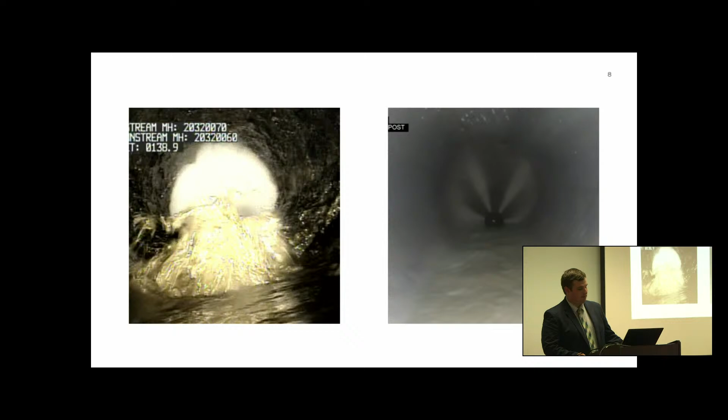These are some photos of that cured in place piping I was talking about. On the left, that's what a pipe in Sea Palms West looks like prior to rehab. That water you see boiling up is actually groundwater that's coming in the bottom of that pipe. And that pipe is so deep that the water table never gets below that point, even when it's been very dry conditions.

So that amount of water was coming in there at a minimum at all times, because that pre-inspection photo was taken in one of the driest parts we've had in the last year. So that's about the low amount of water that would be coming into that line. So that's taking up capacity in the system for something that's not beneficial for us.

So on the right, that's what the inside of that pipe looks like today. So you see that white liner, that is a new pipe that has been created inside the old pipe. That's actually at the exact same location in the pipe. From one end to the other we measure, and we know where we're at. So no more water getting in there. The water you see in there was actually the water from the jetter going through the line cleaning the pipe. So there's no more groundwater getting into that pipe, and we have a brand new pipe inside the old pipe.

It doesn't rely on the old pipe, what we call a host pipe, for anything other than giving it shape. It doesn't rely on it for any of its structural integrity. It just makes sure that it stays circular, because what we do is essentially inflate a bag inside there and create the pipe, because it makes a fiberglass pipe inside there.

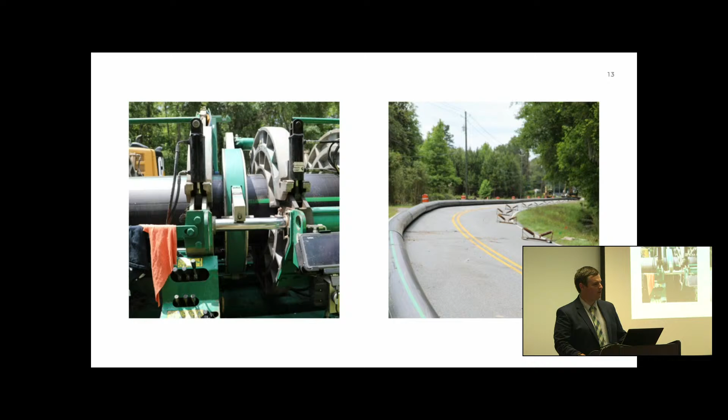Well, you can't install that much pipe in Canal Road or on the edge of Canal Road and have it stretched out that far and actually have cars being able to pass through. So that pipe is installed now and tested. We're finishing up, hopefully in the next couple of weeks, doing the final installs on Ogden down by the canal, and then we'll tie everything together, and theoretically by the end of June, all the flow will be going through the new pipe.

We talked about meter replacements. We're changing out every water meter in the system, and we're getting some benefits there. Not only do we get more accurate readings, some of our registers, the heads on top of the meters, were not functioning. You're not getting overbilled. You weren't getting billed. You're getting a zero read even though you're using water every month. So we're getting those replaced.

But these new ones are called AMI meters, and what that means is we can read meters from our office. Instead of having to send a truck out to go to your house and drive by to read the meters, we can read the meters from our office. Also, we get data logging capabilities with these where we can tell you your usage by the hour. So if you ever have a high bill and you want to know why, we can pull up your usage for the hour, for the month, and we can tell you when you're using water.

Now that'll tell you 2 or 3 things. One, you may find out that you're just using more water than you realize because all your water usage is between 7 in the morning and 10 at night when you're at home. Or you may find that your irrigation system is popping on at 1 in the morning while you're asleep and you didn't realize it was running every morning at 1 o'clock. But we can also find out if you have a leak that's causing that to occur.

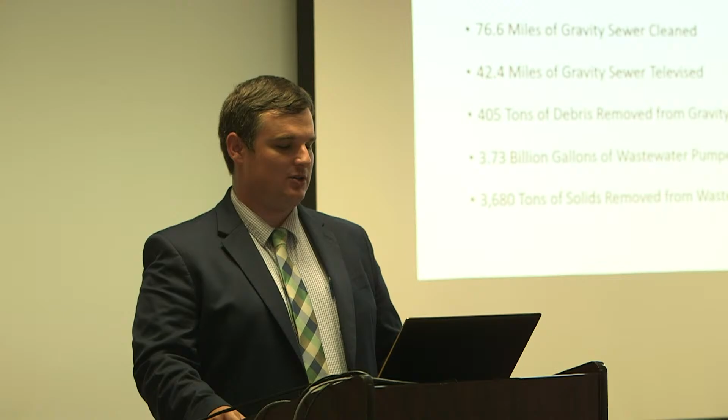So, in the big picture, we talk about things on a day-to-day basis, but for the last 12 months, we have cleaned, and cleaned means jetted. You'll see some of our jet trucks driving around town. We've cleaned 76.6 miles of gravity sewer. Now, 76.6 miles is a lot of pipe. We talk about it in terms of linear feet, but if I tell you we cleaned over 300,000 linear feet of pipe, that's not really a reference anyone can understand.

So we cleaned 76.6 miles of gravity sewer, and just as a reference point, that is roughly the length of Hadrian's Wall in the United Kingdom, the very old wall that was built to keep the Romans and the early Englanders away from each other. That's also further than it is from Brunswick to Savannah, according to Google Maps. So we went past Savannah in miles of pipe cleaned.

We televise. We inspect from the inside. We put a camera in the line and inspect from the inside 42.4 miles of gravity pipe last year. And that ratio makes sense for televising versus cleaning because you clean twice as frequently as you televise. So about half is about where we'd expect that to be. So 42.4 miles is roughly 80% of the length of the Panama Canal. And that's pipes that we inspect so we know what condition they're in.

While we were cleaning those sewer lines, we pulled out 405 tons of debris. And that debris is small particles that fall out. They don't stay suspended in the flow. The velocities slow down a little bit at times and those will settle out. So 405 tons of debris that never actually made it to our wastewater plants.

Well, 405 tons of debris is the weight of 60 adult elephants. I'm an Alabama fan, so I like elephants, so 60 adult elephants got pulled out of the gravity sewers around here in the past 12 months.

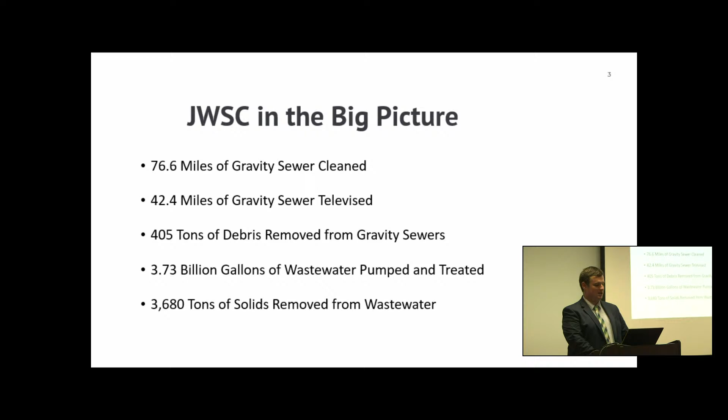So, moving on to 3.04 billion gallons of water treated and pumped in the past year. Now, if you're paying attention, that 3.04 billion gallons is less than 3.73 billion gallons of sewer treated. So why do we have more sewer than water? Well, there's 2 reasons. One, on the mainland, we have large industrial customers that have their own drinking water wells and potable use wells, and they send us their sewer, and we don't sell them water.

We also have what's called inflow and infiltration, or I&I, that gets in our system. That's rainwater and groundwater that finds its way into the sewer system that ends up passing through the plant, so you're always going to have more sewer than water.

3.04 billion gallons of water is enough to fill up Spaceship Earth at Epcot Center at Disney World 200 times. So if you've seen the big circular structure at Disney World, that's 200 of those in the amount of water that we produced in the last year.

There were 717 new service locations, and a service location that was created could be a new single-family residence that was created, or a new apartment complex that was coming online. So that's the number of parcels that has new services at this point. Of those 717, 596 of them actually have meters installed. So that means there's about 120 of those that they've created the parcel, but they haven't actually installed a new meter yet.

In the past 12 months, we've expended $24.2 million in capital projects. Those are projects that we are doing to reinvest in our system. We use a philosophy called asset management so that we know where the worst of the worst in our system is, so we can spend the money where it needs to be spent to replace the assets that need to be replaced.

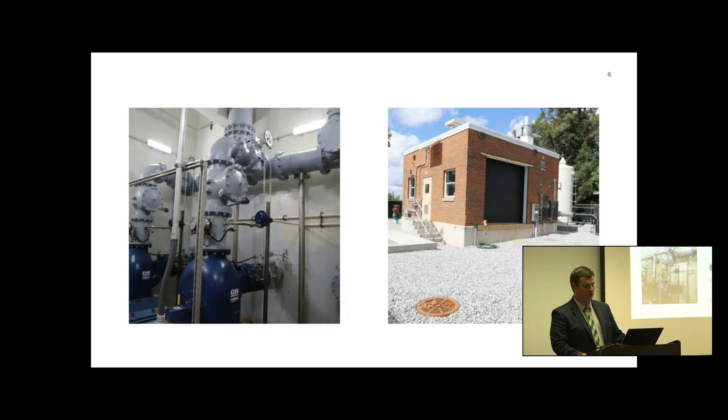On the left, you see a concrete structure, and that is actually the top of the new wet well. That system was bottlenecking in there because it didn't have enough fall in the gravity system, so we put a deeper wet well in so that the gravity system functioned better, and that station is operating very effectively since its completion. Here's some photos of our SCADA system.

On the left, that's just a screenshot of one of the pages we have where we get data. All of those numbers are individual pumping stations throughout the county. It starts with a 4, so that means it's on the mainland. All of those stations... see what's going on. If it turns white, that means the station is pumping. If it's black, it's not pumping.

And the reason we do that is it's called high performance graphics. We want to immediately be able to know what's going on. We don't want to have to interpret what the different colors are. If it's black, it's not pumping. If it's white, it is pumping. So we know which stations are pumping, which pumps at the individual stations are pumping. We also get a lot of trending data here, so we know when a station's maybe not pumping as efficiently as it had been, so we need to go check those pumps to make sure nothing's wrong.

And on the right, that's what the inside of the SCADA panels that we installed look like. We installed 138 of these panels, and every one of these stations has a panel that looks like this. A lot of contactors and relays in there that give us information about what's going on. It also can call us for alarms if there's a problem, but also we can remotely connect into these stations and see what's going on so that we don't have to worry about going out for a call that could wait till the morning, so our guys can actually get some sleep at night.

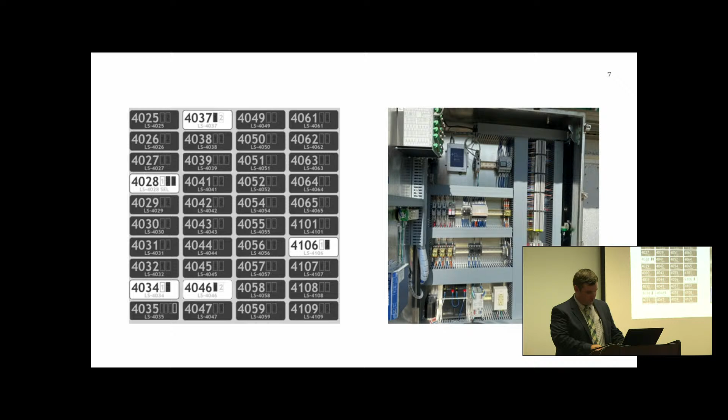Excuse me. All right, here's some of the pictures before and after on the cured in place piping. This occurred in the Sea Palms West neighborhood. On the left, that's a before picture. You see a lot of water bubbling up there at the bottom. That's actually groundwater that's coming in through the bottom of that pipe. That pipe is 17, 18 feet deep, and so there's constantly that much water boiling up in that pipe before we did this project. You can imagine that much water getting in the pipe, and this is just one segment.

We did over 20 in this neighborhood. They weren't all in this condition, but they all had water coming into them. That's taking up capacity in the system for reasons that we don't need it to take up. So on the right, we put a new pipe inside the old pipe without having to dig up the street. So essentially, we take a sock and put it in there. It's not actually like a sock, but we call it a sock.

And it's got resins in there, and we inflate it with water, take boiling water and push it out, and it creates a new pipe inside the old pipe. And so it uses the old pipe, the host pipe, simply to give us its shape, but it's not required to give it its structure.

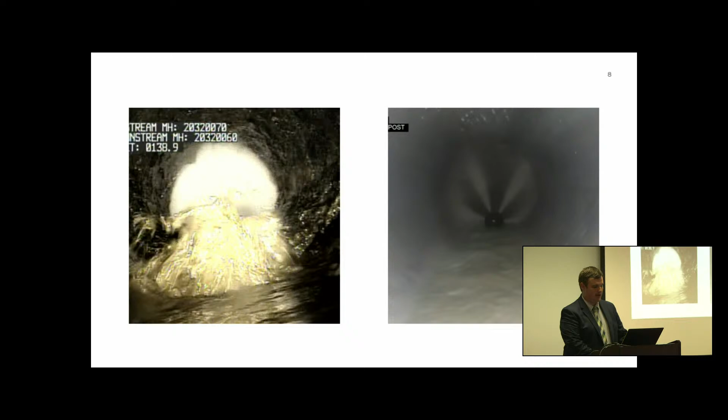The pipe is entirely structural, and we have a brand new pipe on the inside of it. So right there, you see some water in the pipe. That's just the residual water from the jet truck actually dragging the jet head through there to clean the pipe out. So that amount of groundwater is no longer entering the system.

Here's some photos from Magnolia Park. On the left, those are the water lines going in. If you see pipe on the side of the road, blue pipe is for water, green pipe is for sewer. If you see black plastic pipe, it will either have a green or blue stripe on it. So the blue pipe going in there is new water lines installed in the Magnolia Park neighborhood. That project's been completed. The city's still finishing their stormwater and paving portions of that.

And on the right, those are the engineered drawings that the contractor keeps with him in his truck. And what you see there, you see some things highlighted, you see some red marks on there. That's the contractor taking notes for what he's got completed and where he's had to change things from the original drawings that were given to him.

As we know, things are done underground. We don't always know where everything exactly is. So we get there and figure out this has got to shift a few feet one way or the other. These red line drawings let us know where that has occurred, so we can put that in our system so that in the future we know where those pipes are instead of having to figure it out when we start digging.

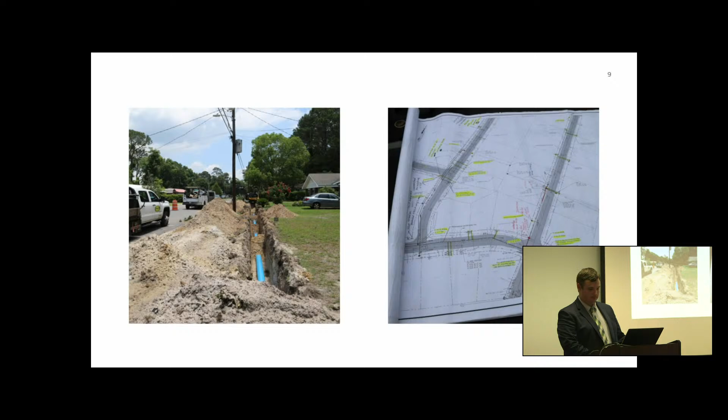Ongoing projects, we've got two large projects that are very near completion, at Academy Creek, the wastewater treatment plant on the mainland. The SPLOST North Mainland project is wrapping up very soon. And that's to reroute flow from Harry Driggers down to the canal. Meter replacement project is ongoing, and we recently kicked off a project in the Arco area to extend water and sewer to that historic neighborhood.

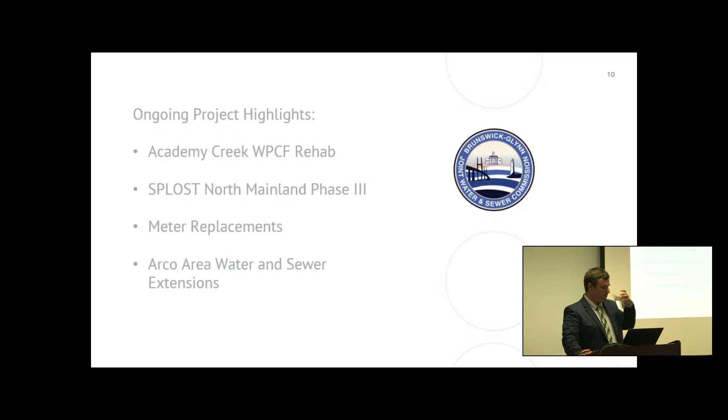So, if you were at this presentation last year, you saw some photos of a bunch of rebar that had been tied together and forms being built for concrete. Well, that's what that structure looks like today. That is new tertiary filtration equipment that helps remove additional solids from the wastewater. And on the right, that's what the inside of those basins look like. The water comes in the back of the structure there, and then flows through.

And the water will actually flow through these cylindrical tubes that have cloth media on them, and the cloth media prevents solids from going through. The best way I can explain it is it's kind of like putting shag carpet from the 70s on a cylinder and letting the solids stick to the shag carpet, kind of like a coffee filter. So that water goes out much cleaner than it came in.

We used to be well within permit, but we would be sending 6 to 8 parts per million solids out of that facility. With these new filters on, we're at 2 to 3 parts per million. So that amount of water and solids going out each day compounds into a very healthy impact on our environment.

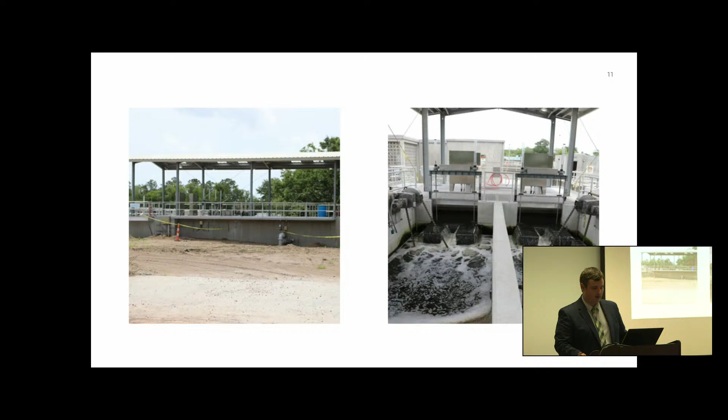There's some new structure on the left there. That's a new splitter box that's been constructed. If you went by in the past year, you may have seen the demolition of the previous structure that was there. This is a much smaller and cleaner looking structure that we've put up. That splits the flow when it comes into the plant to the individual basins that treat the wastewater.

And you see a white pipe coming in the bottom, but there's also one coming out the top. The one coming out the top goes to that gray structure in the very back of the picture, which is enlarged here on the right. That's a new odor control tower like we put in at the pump station at the wastewater plant there on the mainland. If you've driven down Newcastle, you've inevitably smelled that wastewater plant from time to time.

Once that new structure comes online, 99.9% of the odors leaving that facility will be removed through this structure. It's not online yet. It's been installed. We're doing some final touches in the actual structures themselves to enclose them so we can pull the air out and actually send it through the treatment system.

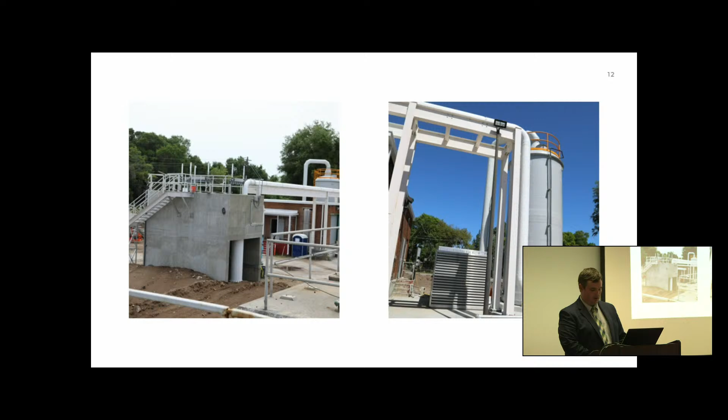But even if that 0.1% gets through the 99.9% removal, that smaller structure there in that right picture is actually a carbon polishing filter. So whatever small breakthrough odors may get through will be sent through that carbon filter, and the activated carbon will actually remove that odor as well. That should be online hopefully by the 4th of July.

These next photos are from the North Mainland SPLOST Phase 3 project. You may have noticed in May we shut down Canal Road for 3 weeks. And why did we shut down Canal Road for 3 weeks? Because we were installing an awful lot of pipe out there.

They drill a hole in the ground and then pull the pipe through the hole instead of having to go through and open cut the entire process. So that is why that was done for 3 weeks, because you can't string out that much pipe and have it all connected together in that area right there and make sure that cars can still go by.

So we appreciate the citizens being understanding of our progress through there, but that is back open now, and they are finalizing some pipe installations on Ogden down by the canal. And then theoretically, by the end of June, all of the water from that North Mainland district will be flowing through the new pipe.

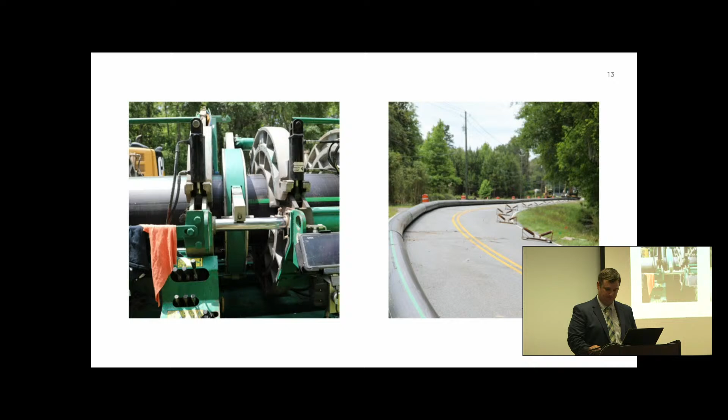That runs to an antenna, and then that sends signals back to our office where we don't have to actually go out to read your meter anymore. Once these get installed, we can read your meter from our desk. But there's another thing it does. It records data and transmits that data every day so that we have hour readings. So we can know how much water you used every hour of the day.

And why is that important? If you've got a high water usage and you want to know what's going on, we can tell you when you're using water. You might find that your irrigation system is popping on at 1 or 2 in the morning while you're in bed. And you can fix the programming and your water bill will go down.

You might find that you've got a small leak, maybe 3 or 4 gallons an hour, that you don't know about that's impacting your water bill. 3 or 4 gallons an hour doesn't sound like a lot, but over a 30-day period, that adds up to an awful lot of water that's going through your meter that's a leak, and we can get that corrected for you and get a leak adjustment.

Worked some on the north end and a little bit on the south end of St. Simons. But all of those meters will be replaced. So by the end of next year, that entire map will be colored in blue from all the meters. So we've got a little less than 31,500 accounts, and we've replaced about 12,500 meters. So we're about 40% through with that project.

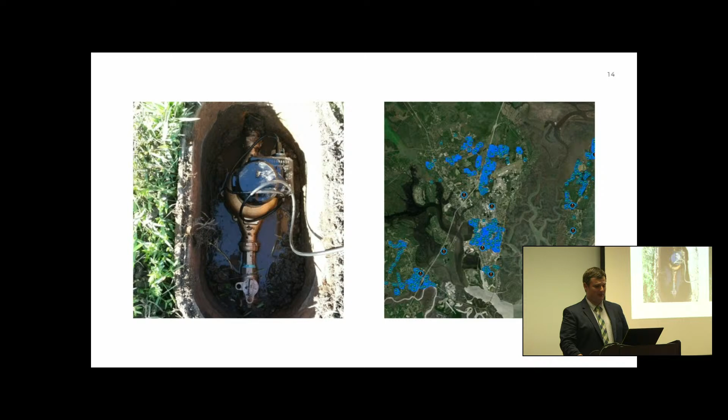This will bring public sewer to 400 new parcels that previously didn't have access to public sewer. And that's important for a couple of reasons. One, a lot of those customers are dealing with failing septic tanks. And once we get the sewer lines brought to them, it may be more cost effective for them to get on our sewer system than to actually go through a full replacement of the septic tank.

And also, we have some lots out there that are vacant that people can't build on because they don't meet the current construction standards of having to have a half-acre lot to put in a septic tank. So once the sewer system is available, those customers that own those properties can build their houses on there and tie onto the sewer and actually get some benefit of owning that property.

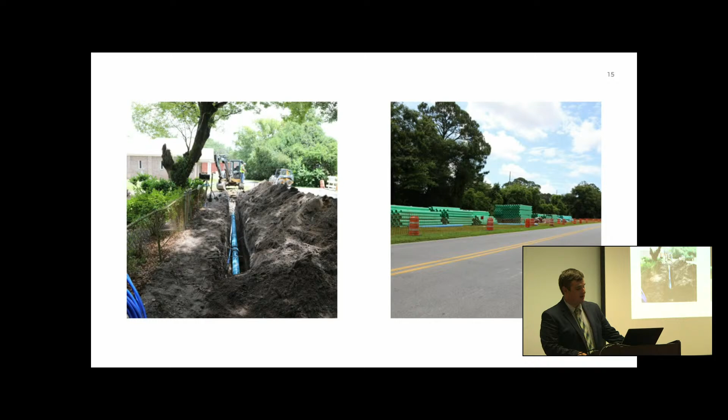We're still waiting on some concrete manhole structures to show up before we can install the sewer system. But once that gets here, you're looking at about 9 months completion time for the whole project. So let's talk about the 2023 budget, which is why we're holding these meetings. Our overall budget for next year is $34.4 million. We are proposing a water-only rate adjustment for high-volume users only.

We have water rates and sewer rates because we have some customers that only have water and some that only have sewer. So the sewer bill will not be changing. The base fees will not be changing. We're only proposing a water change, and we'll go over what those are specifically. And then our capital budget, which is where we do projects from, has increased to $7.7 million from $7.4 million last year. That won't completely offset the increased costs we're seeing on projects, but it will certainly help.

So our 2023 budget, total budget increase is 3.3%, but the rate increase is only 2.1%. Now why is that? Because we've increased our customer base in the county. We got a lot of people moving into town here, so we were able to keep the rate adjustment lower than the total budget adjustment.

But for the last 3 fiscal years, when we've had these meetings, we've said there has not been a rate adjustment. That's a testament to our staff's hard work to keep costs down. For 3 years, your rates have not changed. And this year, going up 2.1% on those high volume users is the only thing we're going to have to do to meet the new budgets in the current cost environment.

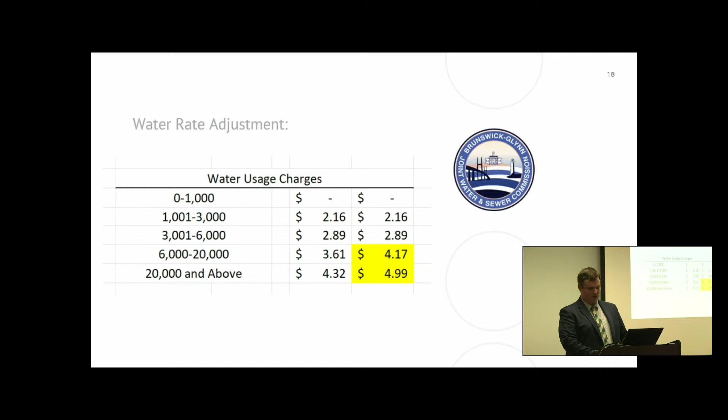If you use more than 6,000 gallons of water a month, you're going to see a slight increase, but it shouldn't be a big deal for you. If you use 10,000 gallons of water a month, your bill's going up $2.24. If you use more than 10,000 gallons of water a month, it'll go up slightly more than that.

But if you're using more than 10,000 gallons of water a month, in all likelihood, you have some high external water usage. So you've got irrigation going on, or you have a pool you're having to fill up, or you may have a leak going on that, once we get the new meters installed, we can tell you about. So overall, 70% of our residential water and sewer customers will see no increase in their monthly bill.

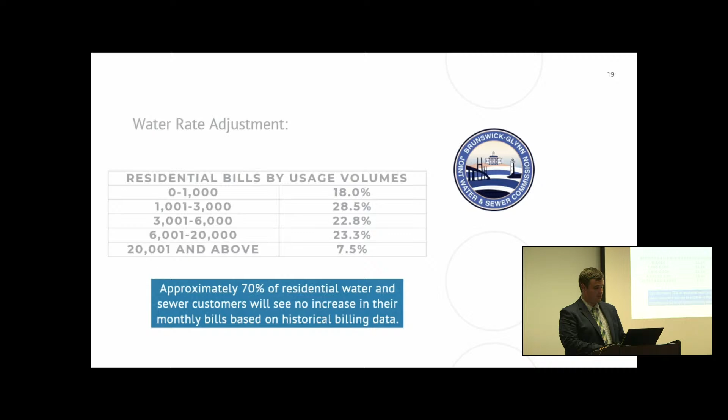So what's driving these increases? Treatment chemicals. We use chlorine and phosphates on the water treatment side. We use chlorine and alum and liquid oxygen on the sewer treatment side, and those chemical markets have gone up substantially. The chlorine costs have gone up over 40% in the past year. Oxygen's gone up 20 to 30%, which is actually not bad compared to what I've talked about with some other utilities. Some utilities are seeing chemical costs go up 150%.

Materials: if you've built a house, tried to do a backyard project and went to the local big box stores, you've inevitably seen costs going through the roof on these things. Well, the same thing's happening for large pipe and valves that we use. Materials have gone up substantially over the last year to year and a half.

Fuel cost: if you've been to the gas station recently, you've inevitably felt that sting on your wallet. Well, we have over 100 vehicles that we roll every single day to do our jobs, and that fuel cost is impacting us. And then property insurance.

We renewed our property insurance, and apparently property insurance providers right now are feeling the sting, so they've increased property insurance rates for commercial properties all throughout the coastal region. We haven't filed any claims. We just got higher rates because the insurance market itself has changed.

Customer service offerings, 3 things I always like to talk about. Automatic bill pay or auto drafting. If you want to just have the exact amount of your bill taken out of your account each month so you never have to think about paying your water bill, we can get you set up for that. Interestingly enough, in the past week I've had 4 individual people ask me why we don't offer that service. Well, we do offer that service. We've had it for 2 years.

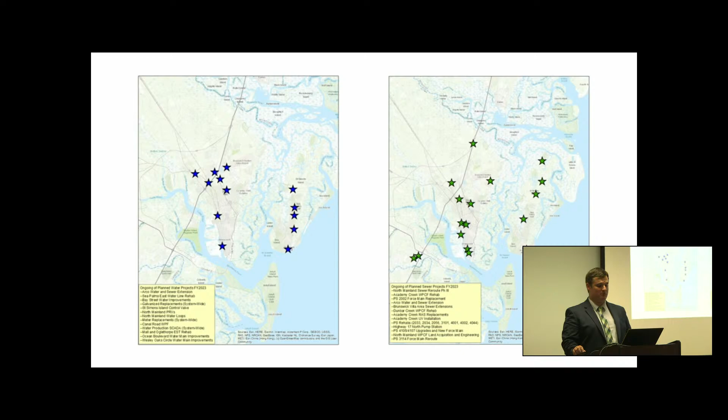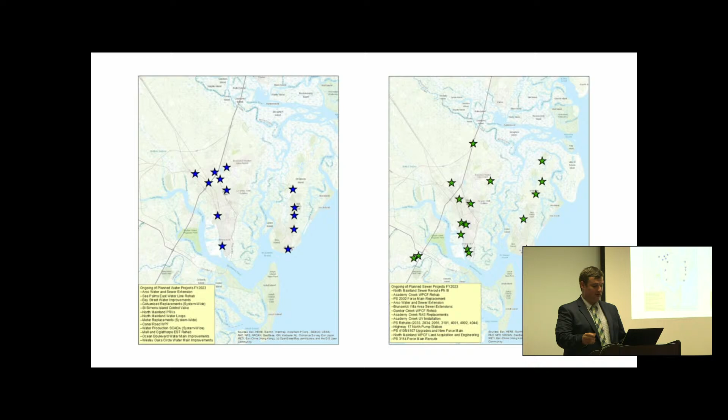There's a lot of stars on there. Some of them are the same because we're doing water and sewer improvements. But we're working on St. Simons, in the North Mainland, in the city of Brunswick and the South Mainland as well. So all in all, a lot of work going on. We take the funds we get very seriously, and we're trying to make rapid improvements to our system.